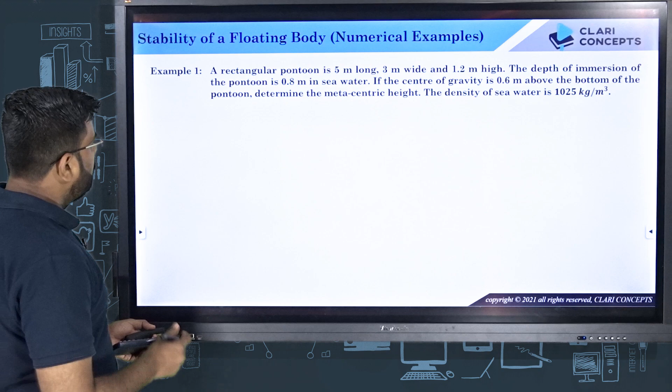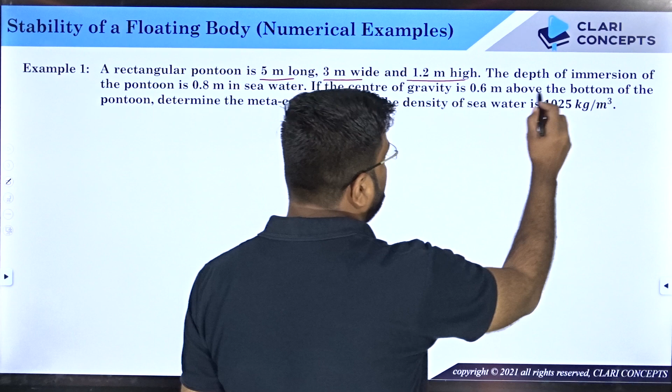Let us begin. The first example says a rectangular pontoon is 5 meter long, 3 meter wide and 1.2 meter height. The depth of immersion of the pontoon is 0.8 meter in sea water.

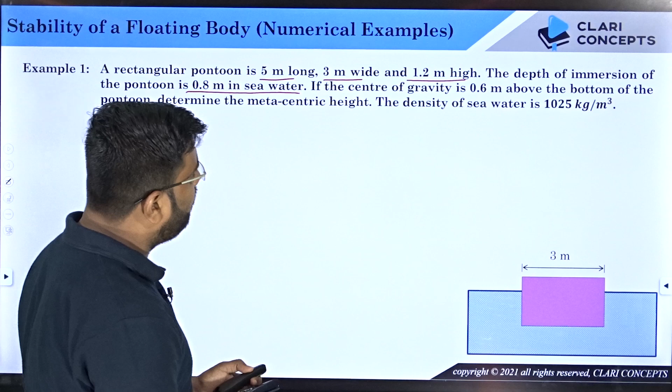So when the pontoon is lying on the surface of water, let's say I have the sea water, and this is floating on the surface. The width is 3 meter and the height is 1.2 meter as discussed, and from the top, the length of this is around 5 meters.

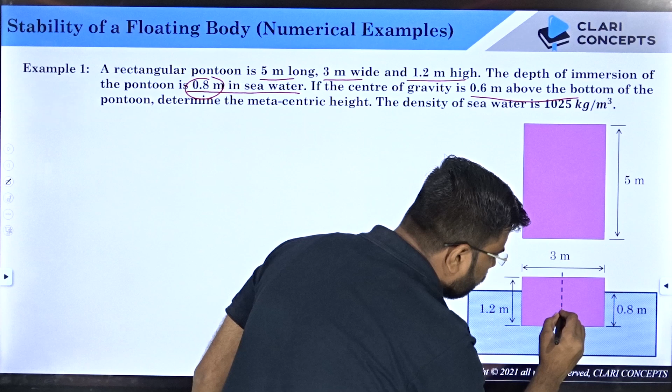Now it is said that the depth of immersion is 0.8 meters, which means the depth here is 0.8 meters. If the center of gravity is 0.6 meter above the bottom of the pontoon, that means this is the bottom, and if CG is here, the distance between the bottom line and G is 0.6 meter.

Determine the metacentric height - this is what they are asking, what you need to find. The density of seawater is 1025 kg per meter cube.

So here density is given to you, but many times when water is mentioned, density is not given, then you can assume it to be 1000 kg per meter cube. So density of the fluid, which is seawater, is 1025 kg per meter cube.

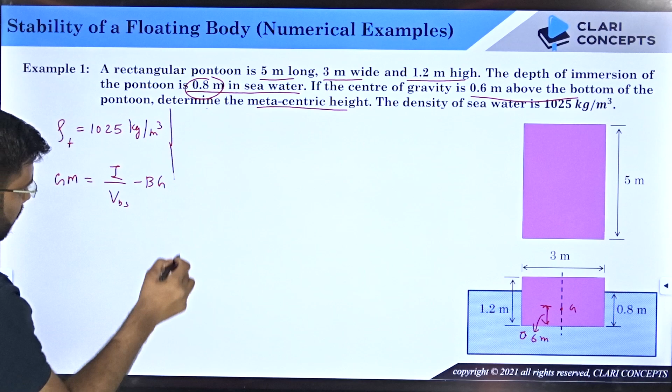Now what is the question? The question is to figure out the metacentric height, that is GM. So GM, as per our formulation, is I divided by volume of body submerged, minus BG. Let us figure out all these three values first and then find the final value of GM. Firstly I'll talk about I.

What is I? I is the area moment of inertia of the area of the floating body. When you cut the floating body at the surface of sea water, whatever area you see from the top, this will be the only area because the width is constant throughout, so you will see the same area. Now the area moment of inertia of this area - from which axis?

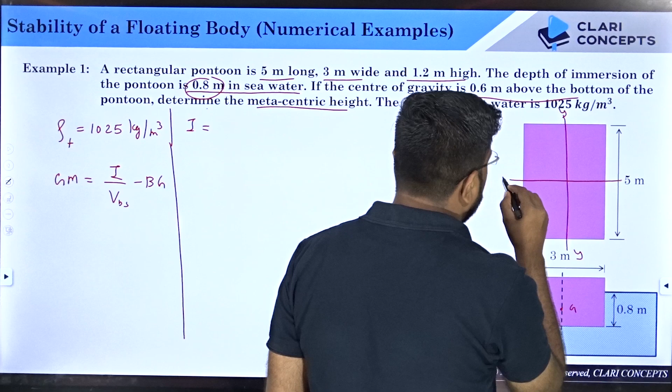I, as I discussed, should be from the minimal value. So let's say this is your YY and this is your ZZ. Firstly figure out I from YY as well as ZZ, and I am 100% sure you will get the minimal value of I from one of these axes. Why? Let us see. So I is what?

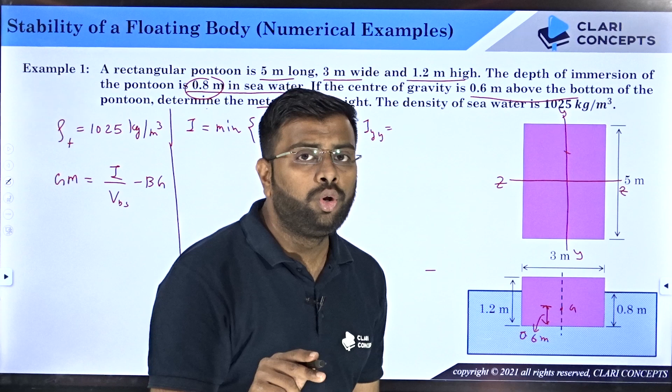I is minimum of IYY and IZZ. So let us find IYY first. What is IYY? From this axis, the area moment of inertia of this area is always BD cube by 12. But remember, the cube should be taken of the length which is perpendicular to the axis that you are trying to find I for.

So let's say I am trying to find I from this axis. Out of these two lengths, this and this, which one is perpendicular to this axis? 3 meters. So the cube should be taken of 3 meters. So for IYY it is 5 into 3 cube by 12. So 5 into 3 cube divided by 12, you will get 11.25.

Meter raised to 4 is the unit, right? And then IZZ - it is obvious because this length is larger, the cube of this. For IZZ, which length is perpendicular to this axis? 5 meter. So 3 into 5 cube by 12. So 3 into 5 cube will always be larger, which is 31.25.

So which of these two is smaller? 11.25, which is IYY. So I will be equal to IYY, which equals 11.25 meter raised to 4. Got this one? Now what is VBS?

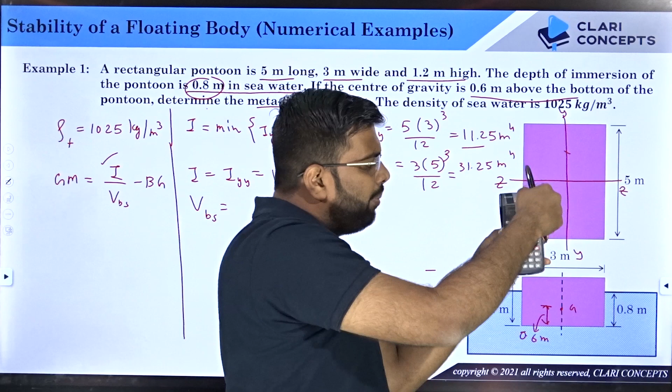Volume of body submerged - how do you get volume of body submerged? Very easy. The depth of immersion is given to you as 0.8. This is 3 meter and the perpendicular is how much? 5 meter. You see, this is the body from top. This is 5 meter. So 5 meter into 0.8 into 3. So VBS is 5 into 0.8 into 3 meters, which is 12 meter cube.

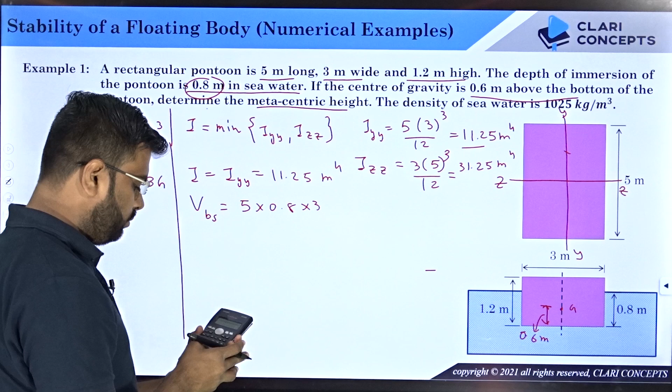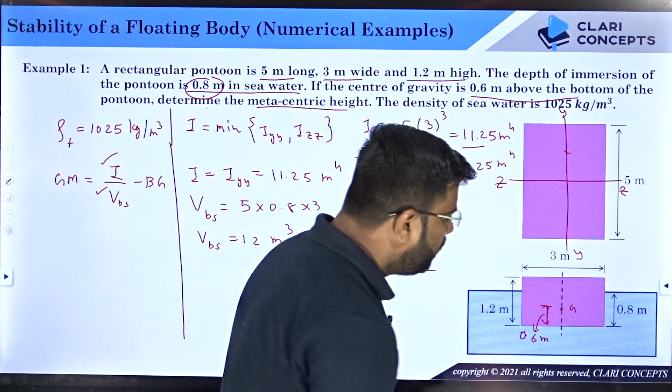Now BG. G is very clear. Where will be B? B will always be at the center of the submerged volume. Submerged volume is total 0.8 meters in height, right? So the center will be somewhere over here, at 0.4. So if I draw the line, B will be over here. But I know the distance between the bottom face and the center is 0.4 meter.

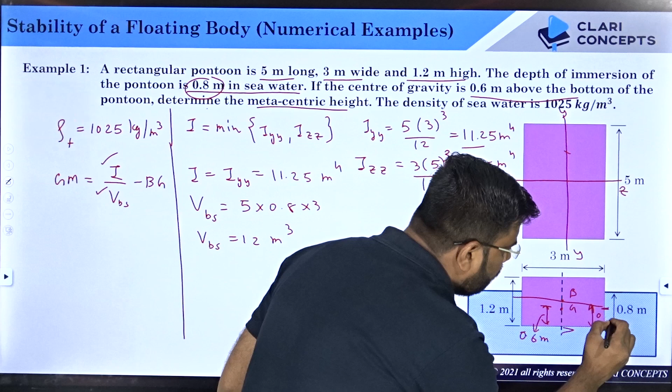So now what is BG? BG will be this distance, which is 0.4 minus 0.6. So BG is 0.4 minus 0.6. I think, sorry, it is said that depth of immersion is 0.8, center of gravity is 0.6 meter. So CG is 0.6, so this 0.4 will be even below than this. I have made a mistake in just drawing the points, nothing else, right?

Let me just show it to you. Let me draw it one more time for you. Okay, see what is said. 0.6 will be half of this, almost over here. So G is over here. So this is 0.6 meter. And where is B? B is half of this, and this is 0.4.

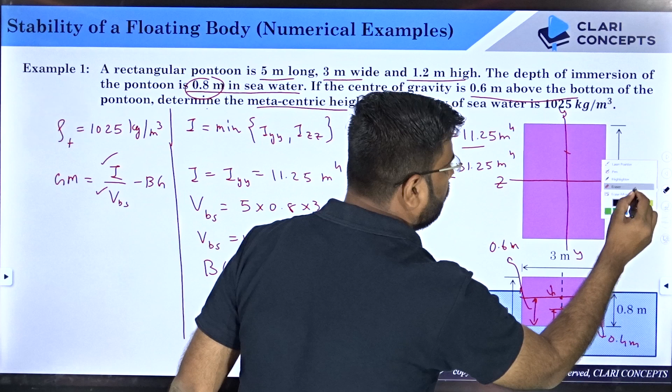Now what is BG? BG is 0.6 minus 0.4. So this is not the correct one, it is 0.6. I made a mistake over here. 0.6 minus 0.4. It happens many a times, right? 0.2 meters. Fine. So now you got this also.

Now just put the values in the formula. Your I is 11.25. Volume is 12. BG is 0.2. What is the answer? See, calculating the answer is not that great part. What is great is

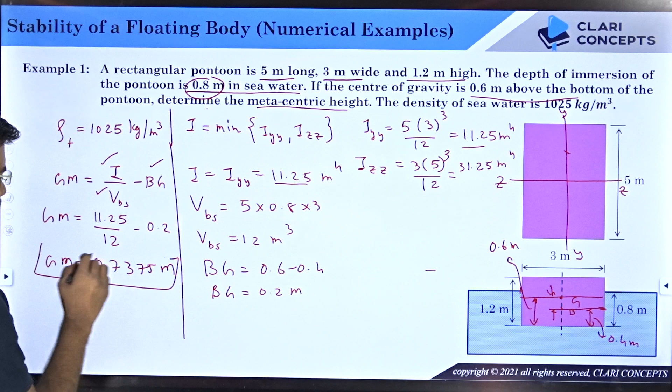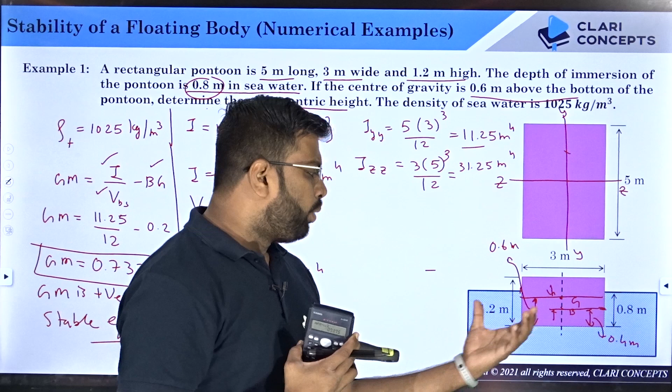understanding the answer. So I will get 0.7375 meters. Now see, which means when GM is positive, it means the body is in stable equilibrium. So this floating body is in stable equilibrium, it will stay there. Even if you provide some disturbance, then again the body will return to its original orientation. Clear? Let me check the answer whether this is finally correct or not.

0.7375. Perfect, it is right. Okay, let me solve another example for your better understanding.

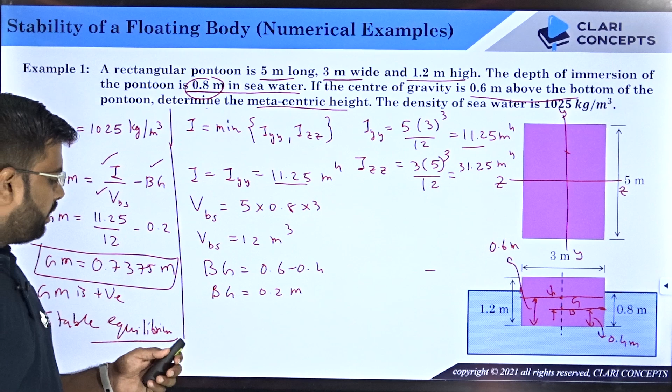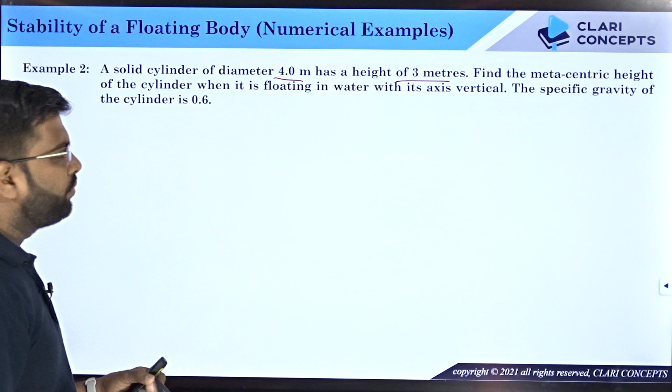So I have a next question with me. A solid cylinder of diameter 4 meter has a height of 3 meters. So you have a solid cylinder whose diameter is 4 meter and height of 3 meter. Find the metacentric height of the cylinder when it is floating in water with its axis vertical. So what is given to you? A water and a cylindrical body which is floating on the surface of water, and when you look at it from the top, this is a circle. So basically this is a cylindrical body. So it's a circular body, and from side when you see, this is the thickness, right?

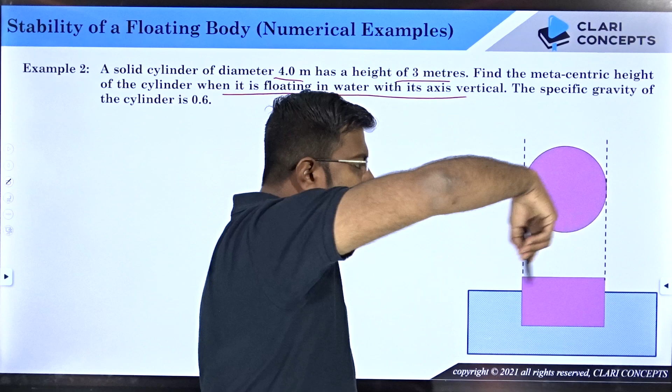So this is given to you as 3 meter and the diameter is 4 meter. Diameter is 4 and this is 3 meter, right? You have been asked to find out the metacentric height. The specific gravity of cylinder is 0.6. So that means the density of the cylinder is equals to 0.6 into 1000, which is 600 kg per meter cube. And since it is immersed in water, the density of water is 1000 kg per meter cube.

All right. Now I need to find the GM. For GM, what did I do? I need to have GM is equals to I divided by volume of body submerged, minus BG. Let me find all these three values first. First, talking about the I.

For I, it should be minimum of IYY and IZZ. You see, when you cut this body from the surface of water, the section that you will see from top is circular, and this is your, let's say, YY, and this is your ZZ. For a circular shape, IYY and IZZ, both of them will be equal, and which is equal to pi by 64 d raised to 4.

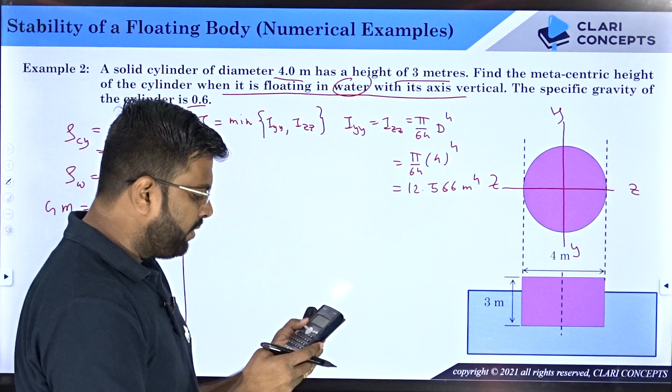So pi by 64, I hope you are remembering this formula, no? Because I am not here to help you out with the formula. So I hope that you are aware about the formulas of area moment of inertia. Then multiply by pi. I think this is around 12.566 meter raised to 4. Let me just check it once again so that I am sure that I have made a perfect calculation. Alright. Now, so I you got as 12.566 meter raised to 4.

You got this one. Now, what is volume of body submerged? For volume of body submerged, you need to know this depth till which the body is in the fluid medium. So this has to be determined. Let's say this is h, for example. Now, how will you calculate this h? See, very simple. Once you know h, you can say pi by 4 d square into h will give you volume of body submerged.

But for h, you need to identify that since the body is floating, the weight of the cylinder should equal the buoyancy force. Yes or no? Because it is always floating. So weight of cylinder, mass of cylinder into g, should equal the buoyancy force.

Buoyancy force is the weight of fluid displaced, so weight of fluid displaced is mass of fluid displaced into g. G will cancel. Now, mass of cylinder is density of cylinder multiplied by volume of cylinder, which should equal mass of fluid displaced, that is density of fluid into volume of fluid displaced.

Now what is density of cylinder? This is 600. What is volume of cylinder? Let's say cross sectional area is capital A and the height is 3 meters, total height of cylinder. So I can say capital A into 3. I'm substituting area because I'll let you know why area will get cancelled, so I'll not put the values yet.

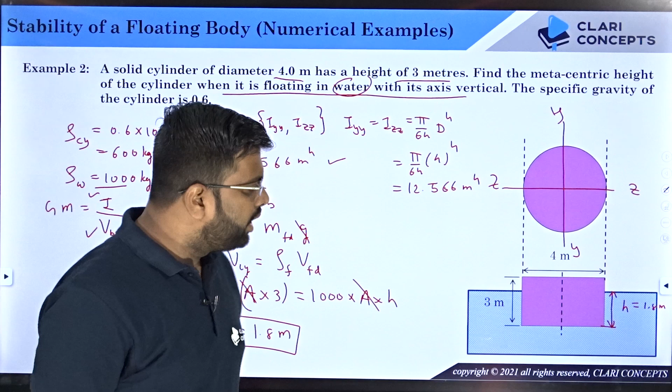Now what are you left with? Let me check. You got I, you got VBS, you need to find BG. Now how will you find BG? This object is uniformly dense, so you can say CG will be at the half of this, since 3 is the total length. So CG will be somewhere over here.

So this is G, and this distance will definitely be how much? This is 3, so this will be 1.5. Although it does not look like half, imagine that this is the half length, right? 3 half is 1.5. Now what is B? B will be at the center of the portion which is submerged. So submerged portion is 1.8 meter, center will be at 0.9 meter, so somewhere over here, let's say.

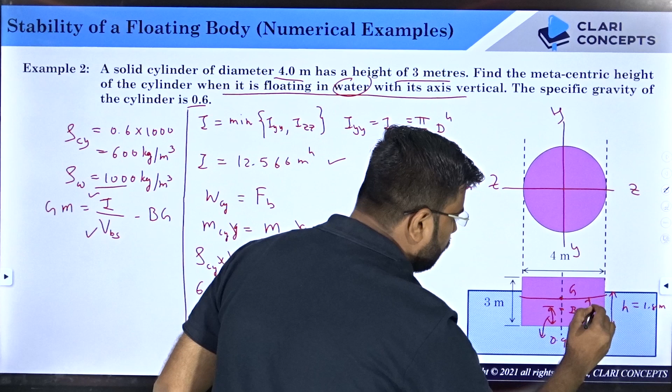But this distance is how much? 0.9 meters. So what is BG? It is 1.5 meter minus 0.9. So BG will be 1.5 minus 0.9, which is 0.6 meter.

Now I need to find the metacentric height. Metacentric height GM equals I divided by VBS minus BG. What is I? Just find out I, 12.566. Divided by what is VBS? 22.62, and what is BG? 0.6.

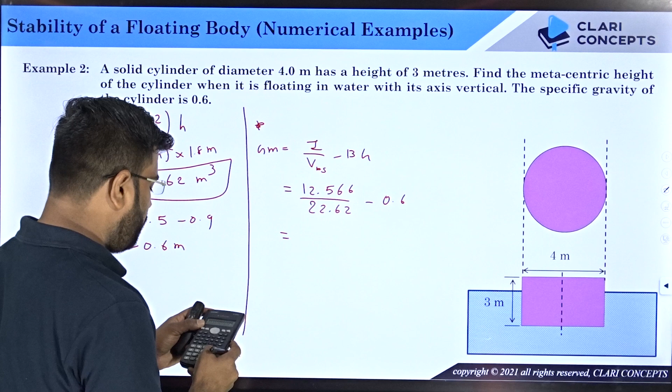Let me calculate the answer. 12.566 divided by 22.62 minus 0.6, that is minus 0.044 meters. Let me check the answer. Correct. Which means GM, that is metacentric height, is negative.

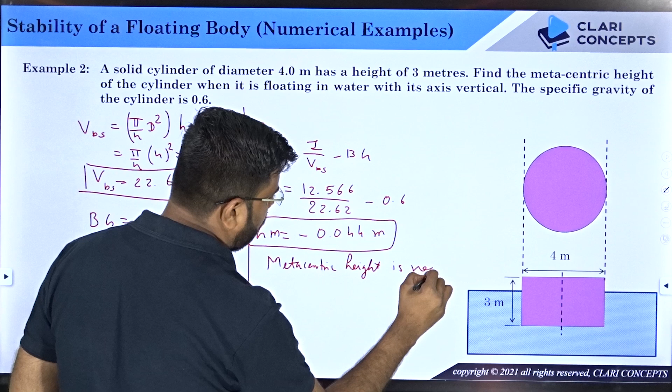Metacentric height is negative. It means your metacenter is below center of gravity, which means your body is in unstable equilibrium. This floating body is in unstable equilibrium.

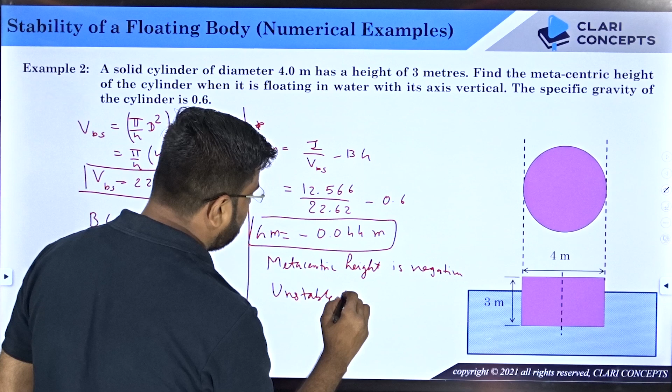Now try to understand what this word means. Equilibrium means the body is already in equilibrium at this point of time. The body will definitely float. It does not mean that body will not float, body will sink. It's not like that, body will float at this position only.

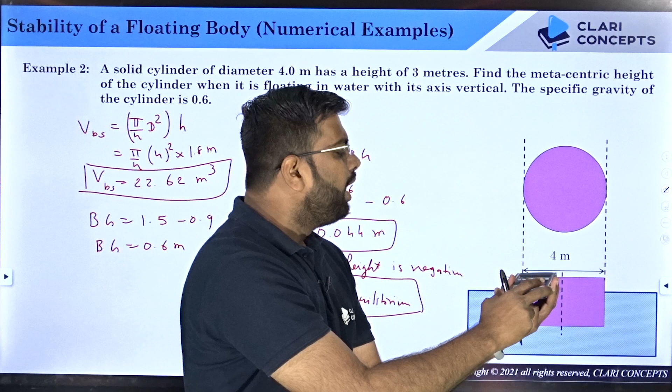But when you say unstable equilibrium, it means that if, for an instant, a simple gush of wind interacts with the body, or you throw a small stone on it, and the body is disturbed from this particular position, then the body is not going to come back to its original position. Rather the body will float but at a different orientation now. So that's why it is unstable equilibrium.